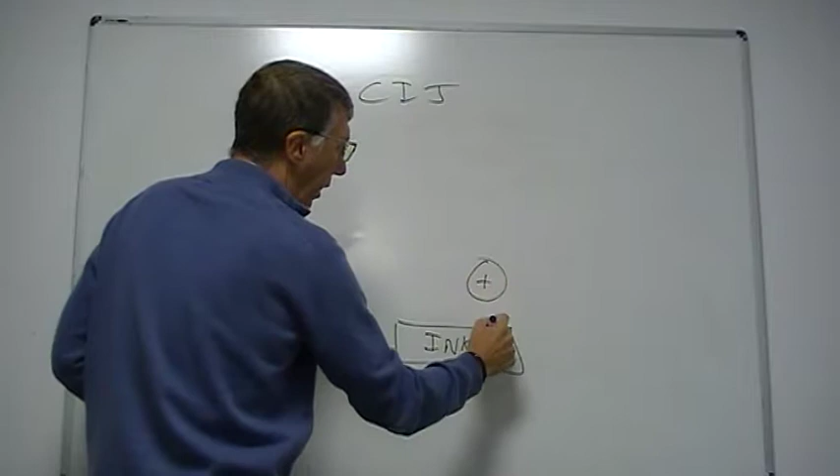The printers we're working with are CIJ, continuous inkjet printers. That means we have a reservoir of ink, a pump that takes the ink out and pumps it into a print head, where it comes out. Some of it goes onto the product we're printing, and some is recirculated back round the gutter into the ink reservoir, so the ink we don't print goes back around.

But what we're going to look at today is this portion of the system - how do we make the print drops in the head?

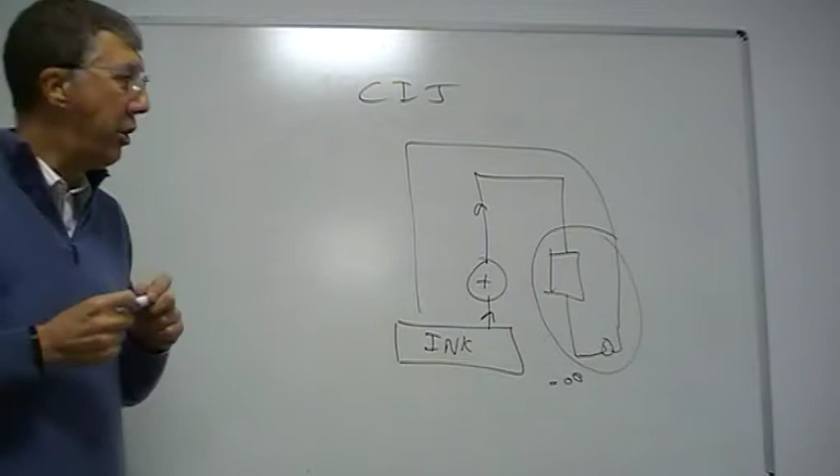There's a lot of strange terminology that we use here. In our print head, we have what we call the gun body. I'll draw them square and rectangular rather than their real shape. The gun body can have many different shapes and sizes, but it's called the gun body because it fires the ink out of it like a bullet.

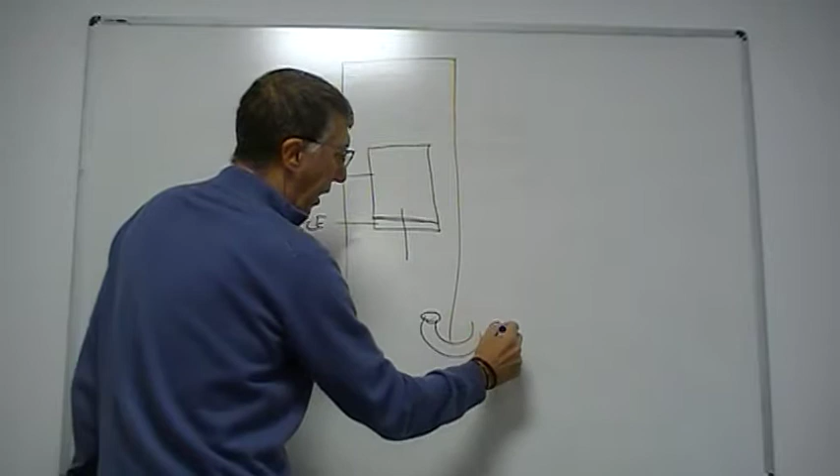Out of the gun body comes the ink. It comes through, and underneath here is a nozzle, and the ink comes out this nozzle. At the bottom there is a gutter, and there's also a hole in the plate where the drops can be sent out onto the product that's going to be printed, so there is print on the product.

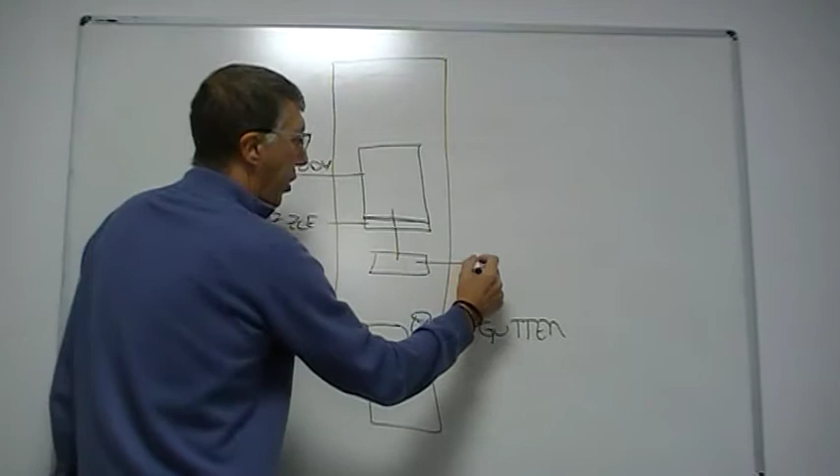Also in here we have what we call the charge controller, and we have two deflection plates.

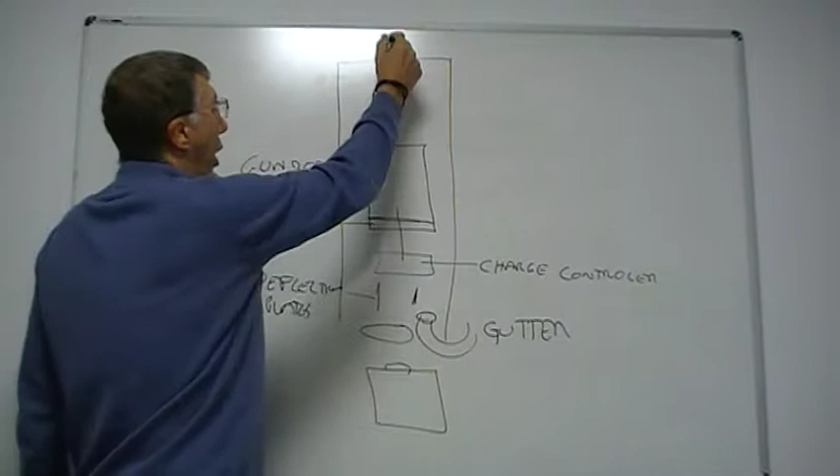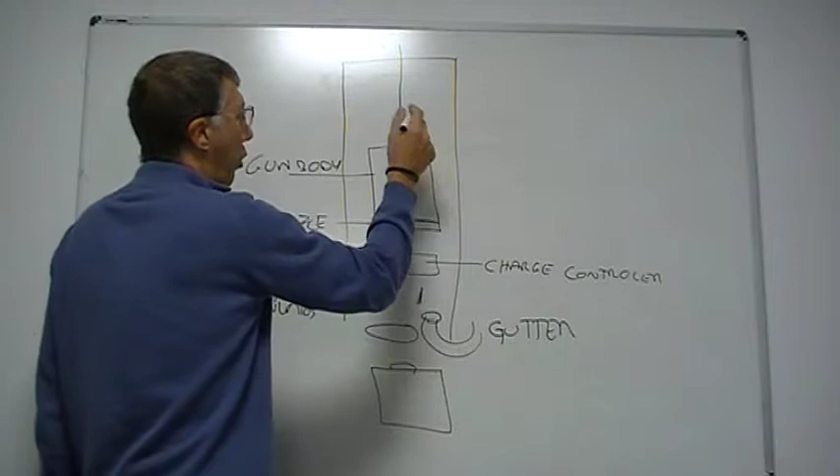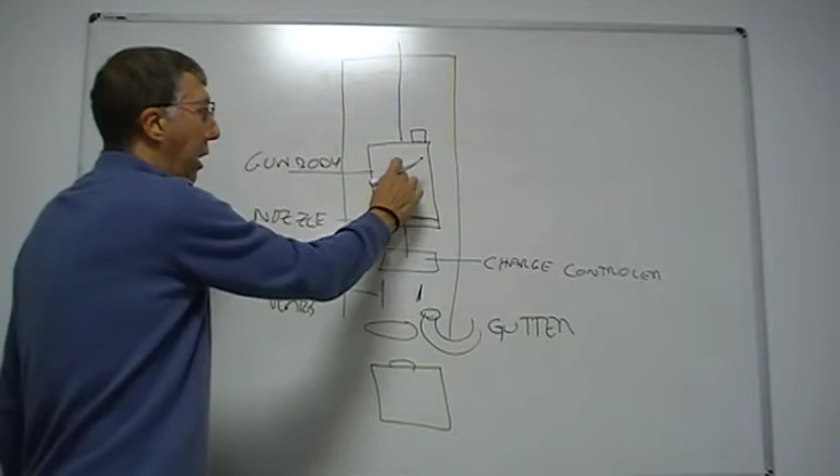So we have the ink coming in, we have a valve that lets the ink go out or stays in there, and we have another thing which we'll call the drive rod - they have various shapes. The drive rod is the item that's going to vibrate the ink inside here at a particular rate.

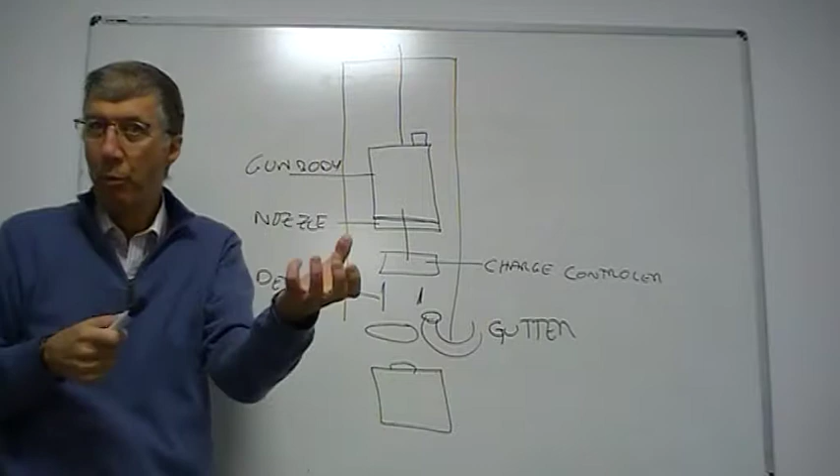This is very much like going out into the garden with a hose pipe in your hand, spraying water out of it, and you start shaking the hose pipe and it breaks up into blobs. That's what we're trying to do here, because we need to get the blobs out so we can put the different blobs onto the substrate.

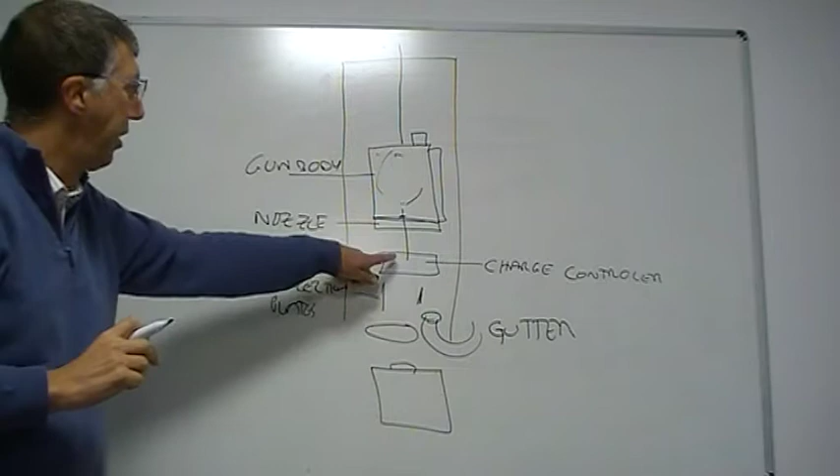So we've got the vibration going on here, the ink is in this reservoir. There's also a heater attached to the reservoir to keep it at the right temperature. Inside the gun body there's a valve over here - the valve opens, it forces the ink out of the head, going through the charge controller where it's charged down here.

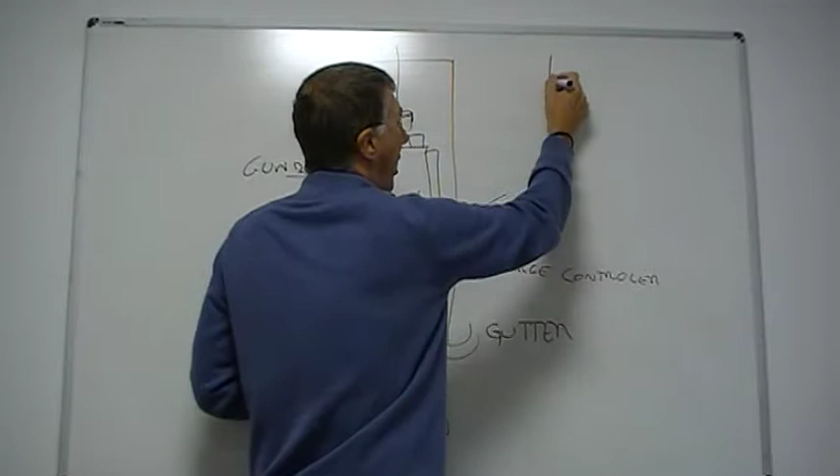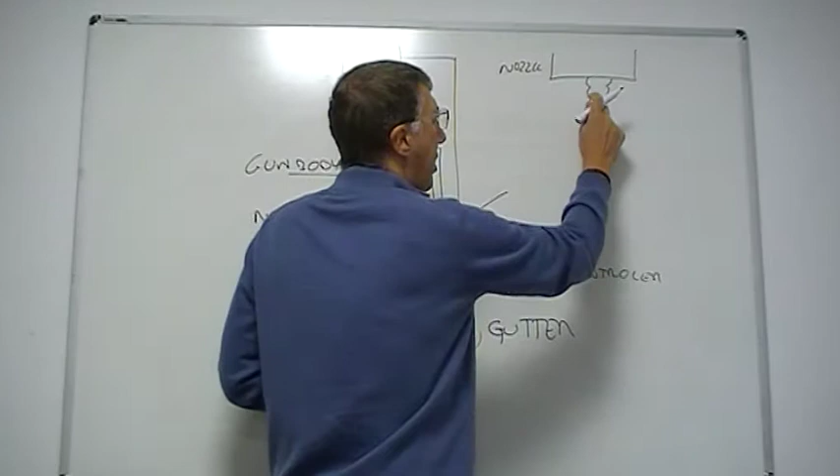Now we're going to look at this section of it, with a bigger view. So we come out of the nozzle and the ink is starting to break up into its blobs. Eventually the ink will start to break up, and normally it has a dimple in the top when it's broken off.

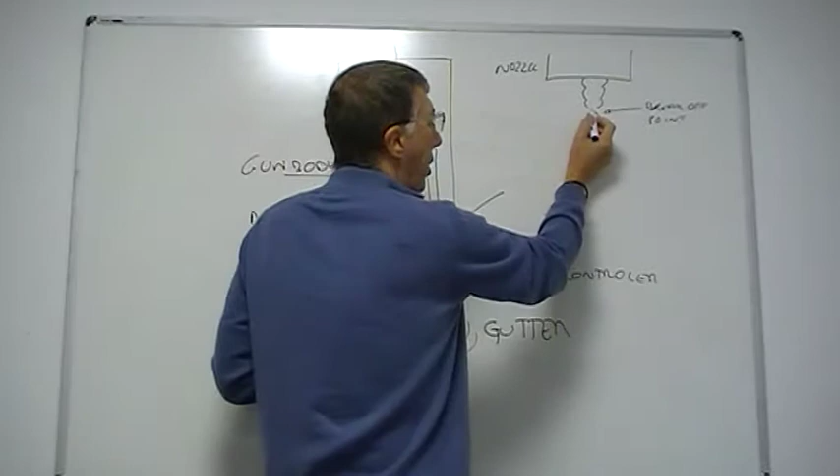That is the important item here - that's called the break-off point. Now why is that important? It's important because this is the moment that we put the charge onto the ink.

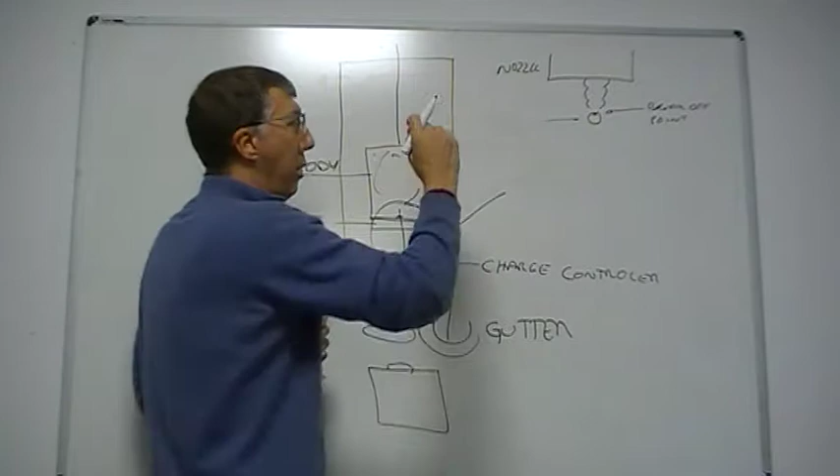At that moment, that ink drop should just be entering the charge controller - not above it, not below it, not in it, it should be just entering. So we have the charge controller, got a little tunnel where it goes into.

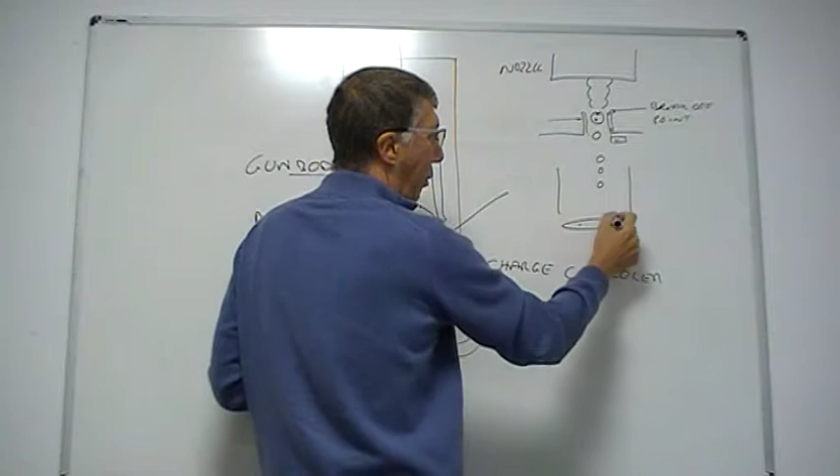In here it will apply a positive charge onto that ink drop. The drop carries on through, and over here we have a charge detection - the charge detector will check that the ink drop has a charge on it. The ink carries on through, and the deflection plates will now have an influence on where it's going to go, because they'll attract or repel the ink drop so it falls into the right place, either the gutter or onto the substrate.

Now, that's all good, that's the perfect way to have it. In the real world, things aren't like this - there's a lot of items that can have an influence on this break-off point.

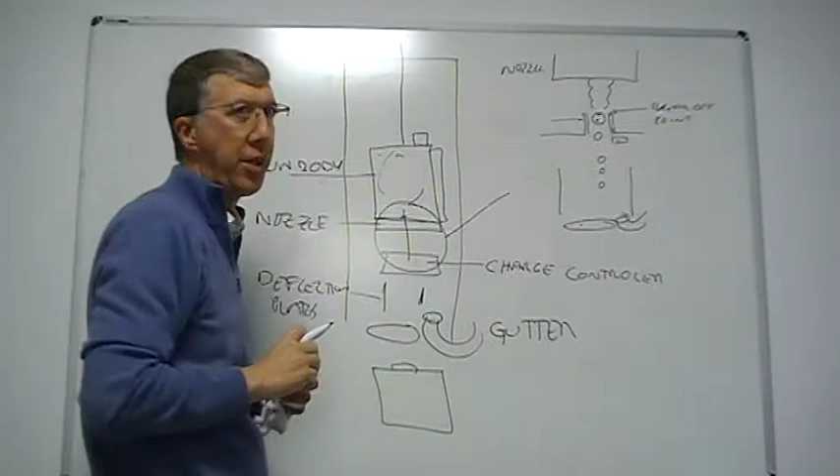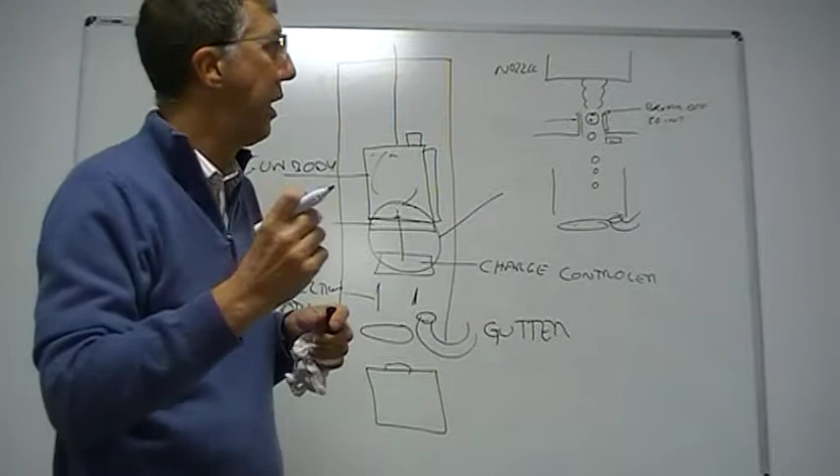Even though we might have set it correctly, things like the temperature of the ink, the frequency we're vibrating at, and the viscosity - how thin or how thick the ink is - could mean that this break-off point happens over here instead.

Now, instead of being able to get the full charge, it only gets a partial charge. Or worse still, we're applying a charge to this stream of ink that goes back up there. So if we want to apply 50 volts over here, it's not going to be 50 volts because it's all going to drain up into the top.

So we have this charge detector here, and every so often we send through a special sequence of voltages called the phasing volts.

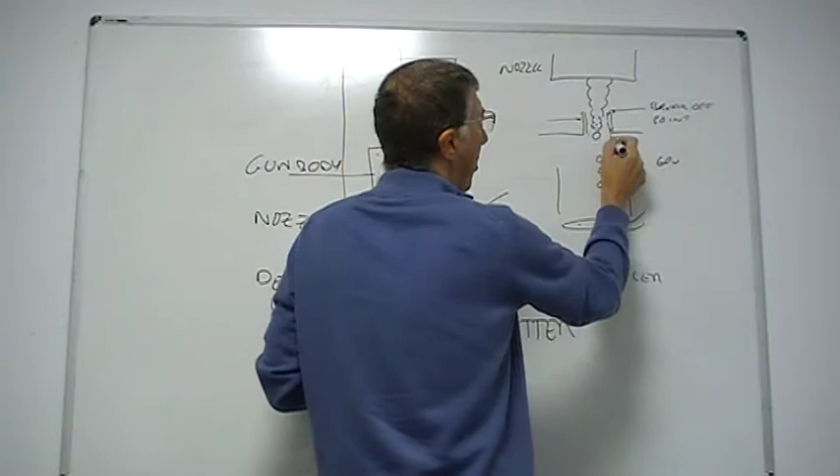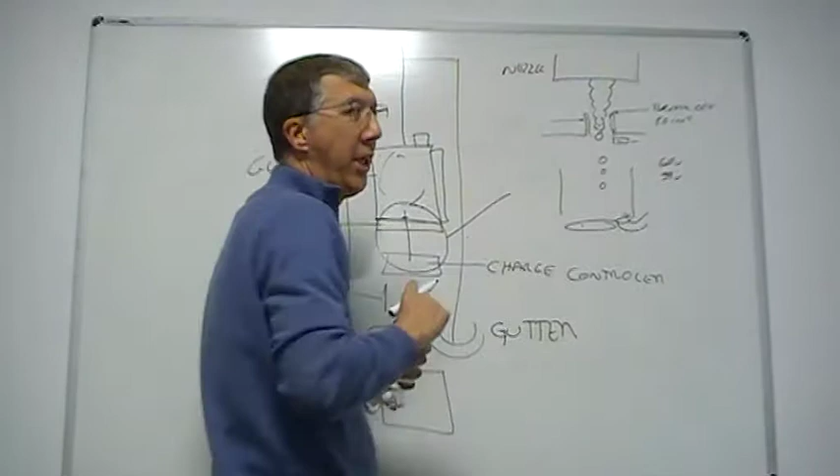So I know if I put onto that, say for instance 60 volts, by the time I read it I should have round about 59 volts in that sort of region. If I don't get that, then I need to do some tuning of the ink to make the break-off point happen in a different part, and this is called phasing.

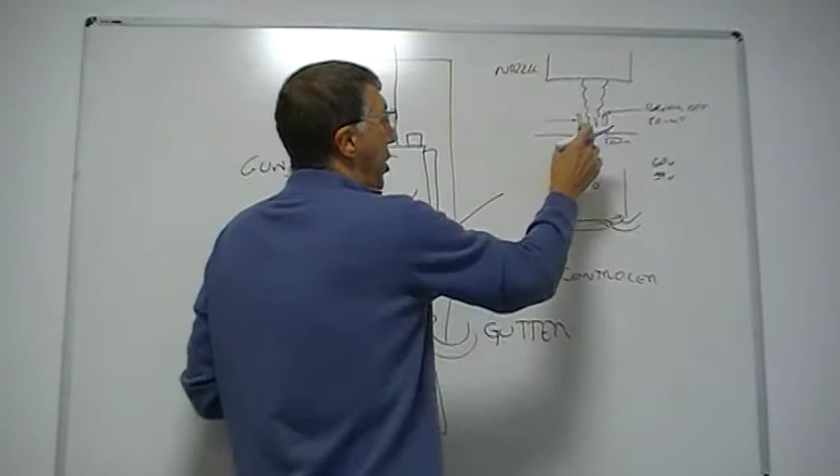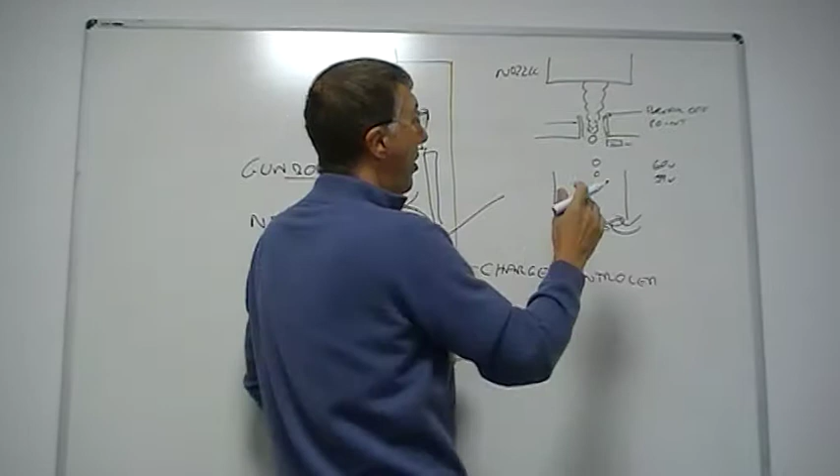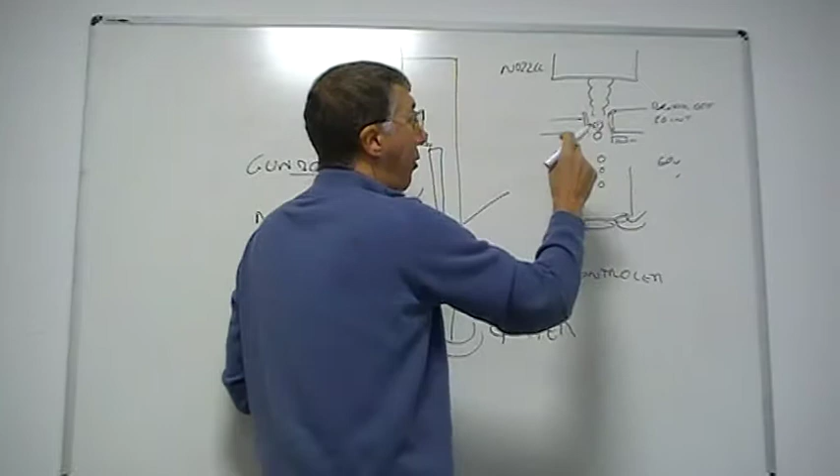You'll hear that term, phasing. So we might change what we're vibrating at, we might change the pump pressure, we might add some makeup later because we're getting thick ink, we might do various things, but we will test again. We'll do one change, we'll test. If we're getting closer to the value that we should have, we'll test one where we're pulling this ink stream up a bit and one where we pull it down a bit, and see which one was better.

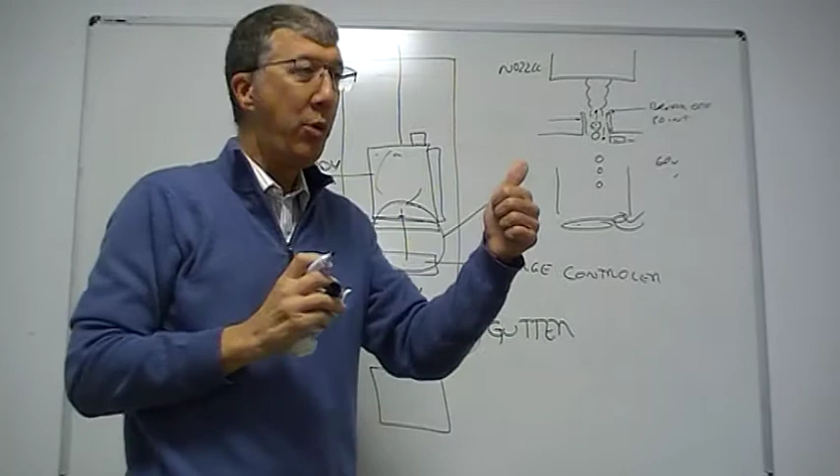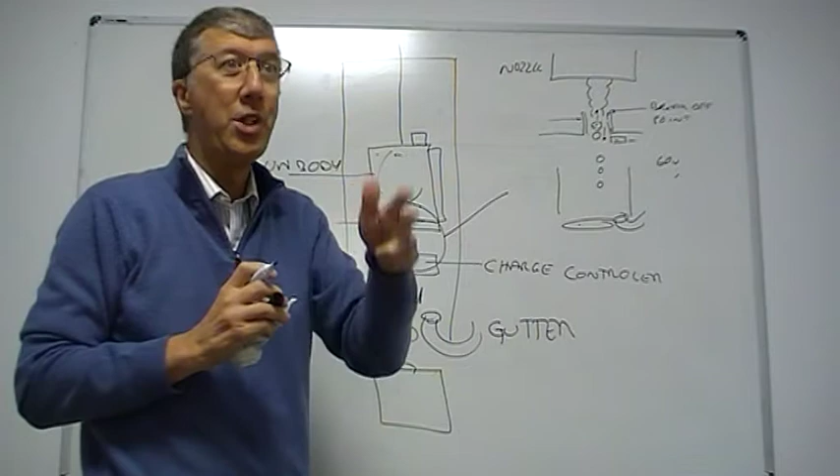So we had the first test that we did, we moved the ink stream one direction, then the other direction - which of those three gave us the best result? Then we moved to that result and we do the test again. As long as we've got time to do the test, we will carry it out. If we're printing, we stop the test and go to print. When we stop printing, we come back and run the test again. So we're constantly tuning so that every print can have the best quality.

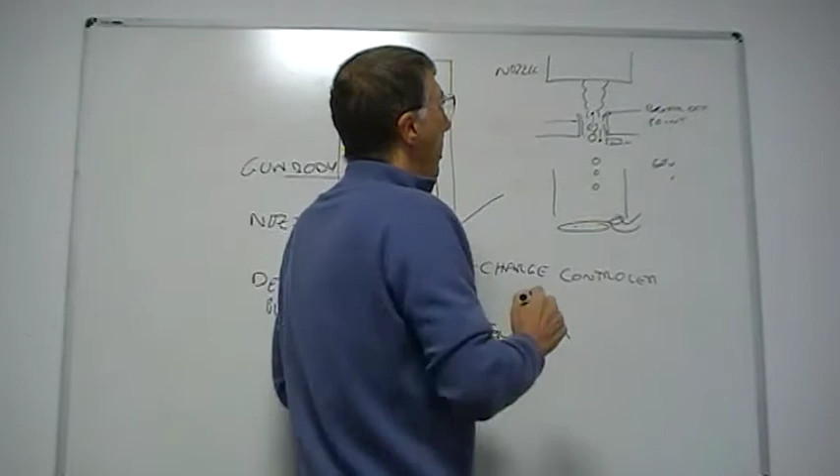So that's called the phasing. There's normally 16 phasing positions that it can have, and those are to do with changing the charge, the pressures, the vibration, and a lot of other things that go on in there.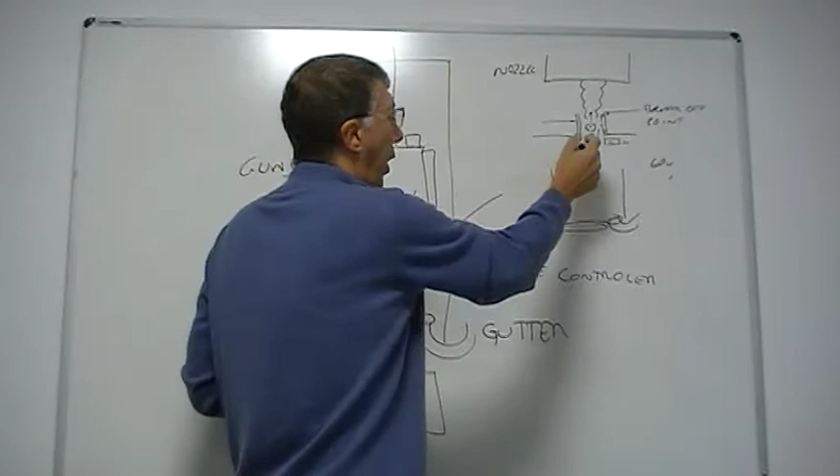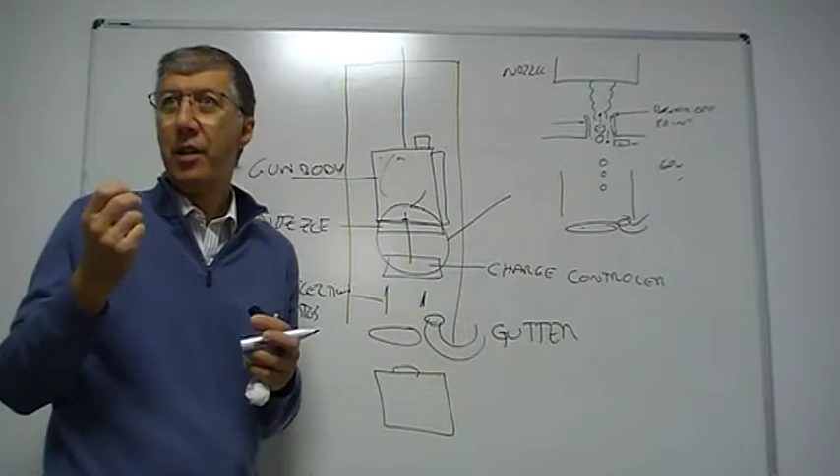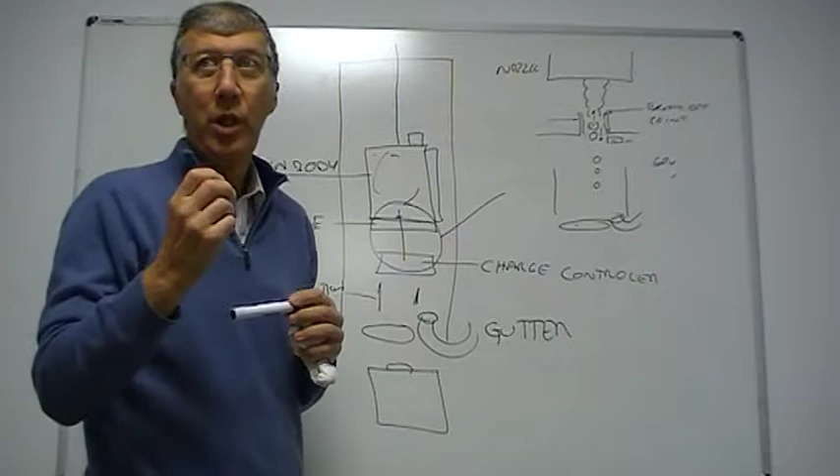One thing you might ask is, how do you get a charge onto a liquid? So the inks that we have are special inks. They add salts into the ink, electrolytes that will attract in the voltages that we apply. So it's also very important that the ink we use is not too old, because those electrolytes can fall out of the ink. If I was to apply a voltage to very old ink, it's not really going to do much.

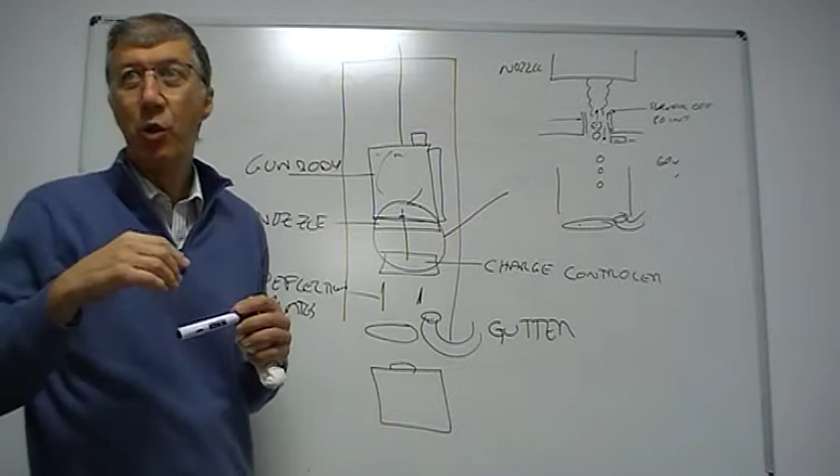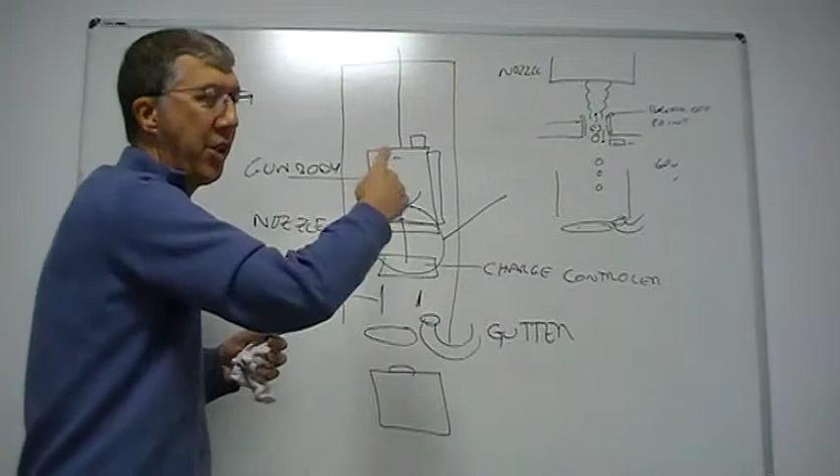This is why our inks have things called shelf lives. It can only sit there on the shelf doing nothing for a certain time, and when it's in the system, the ink has a lifetime in the system. It's 2,000 hours, 600 hours, depends on the type of ink it is and how quickly the electrolytes would come out of it.

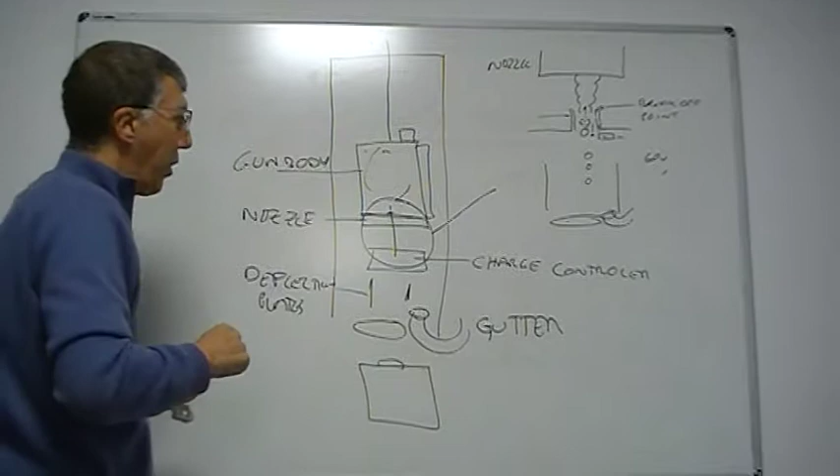So this is how we're going to make our ink drops. Any questions?

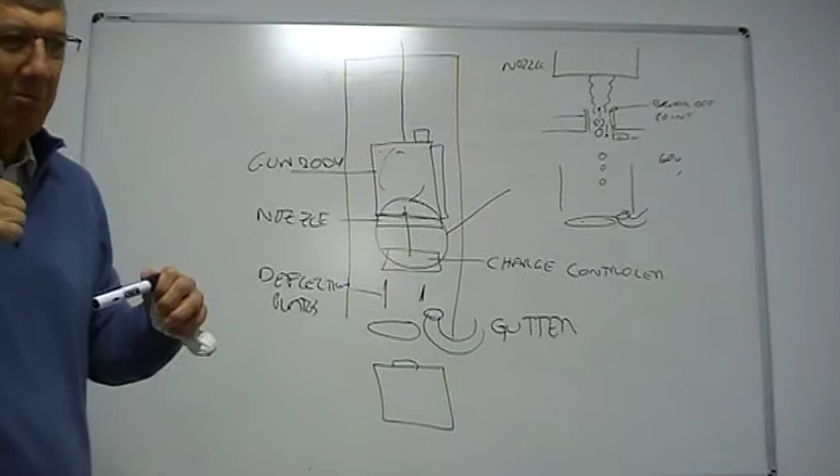Was it? Can't remember. I probably heard, but what determines how far the drops are deflected? Do you control the deflection voltage or the charge voltage on the fly?

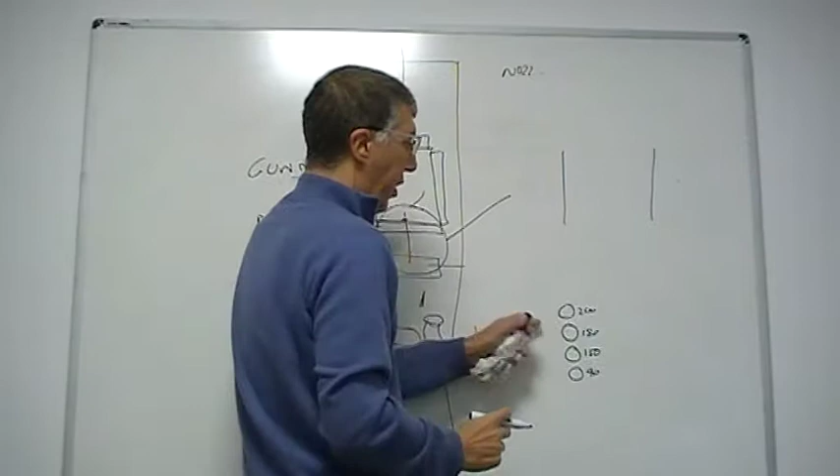Last week we did rasters, where we found out that rasters are made of drops. Each drop can have a voltage on it, so we can charge our drops. The drops come out here and they're charged - say 90, 180, 200.

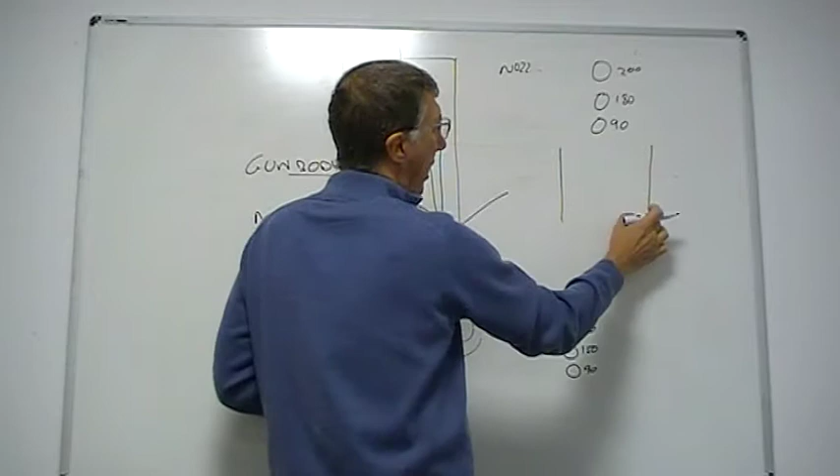In this here there are two plates, and the two plates have an electric field between them, so one will be positive with respect to the other. That remains constant? Yes, that's constant.

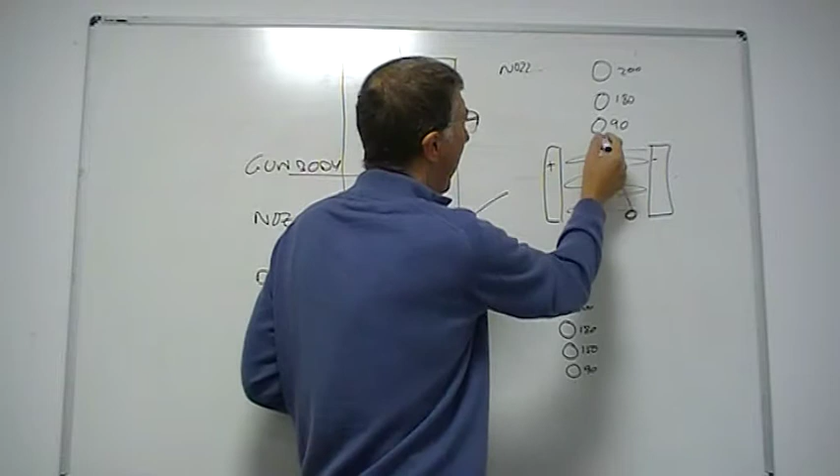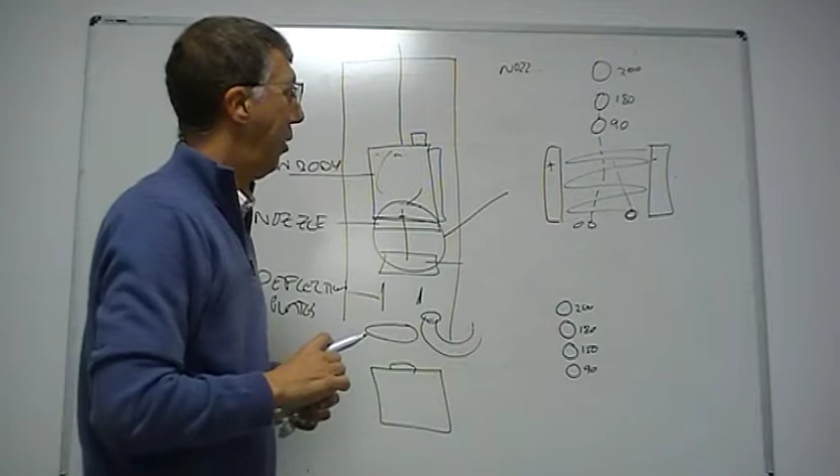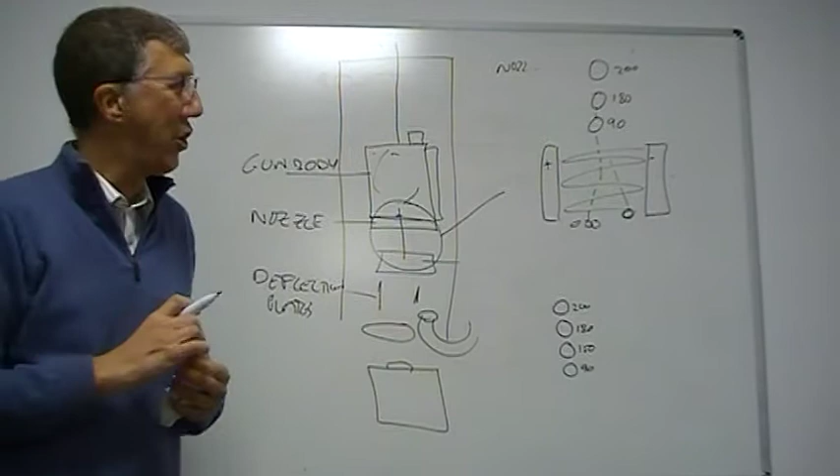If you would be controlling the deflection voltage on each drop, you would get very slow print speed. Yes, yes - an innovation project for you, to see if you could do that. There are many ways, but this is kind of the standard way of doing it.

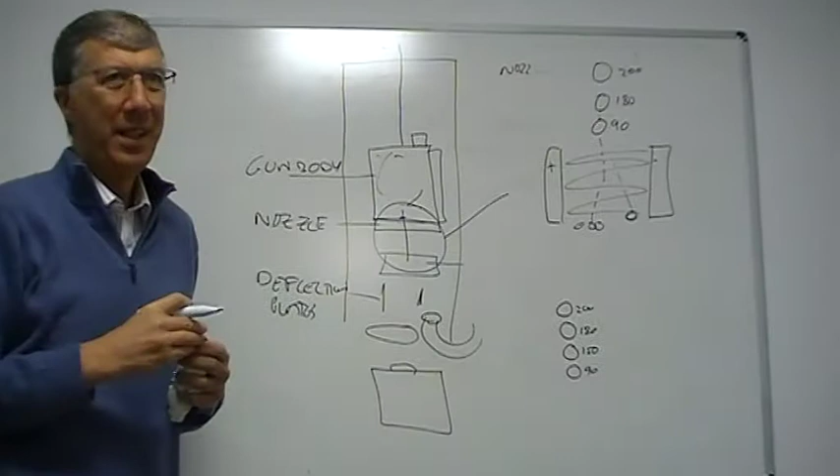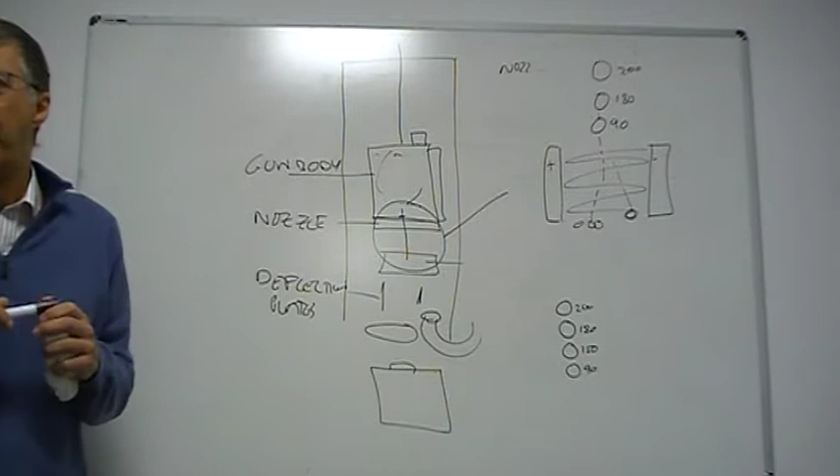So what impact would we notice if the system doesn't have enough time to phase? So there you would get this bad print.

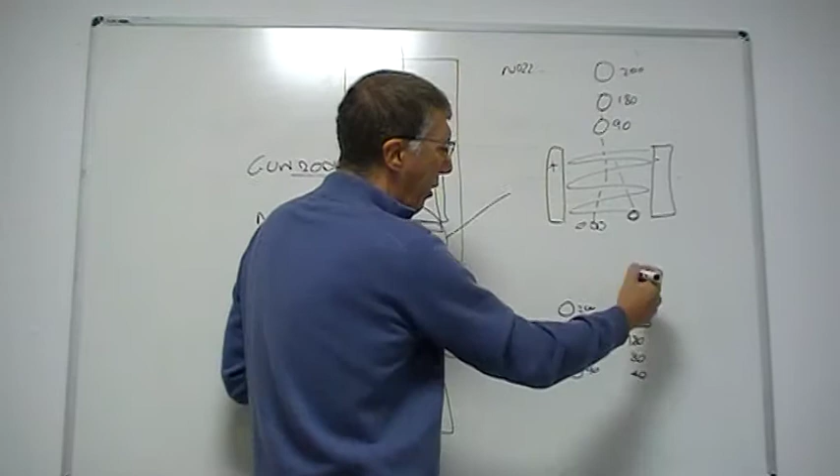So you would see, instead of having your print nice like this, because we weren't able to get the full separation, we applied the voltage, but because it was all co-joined and went back up, we might in reality have something like 40 volts, 80 volts, and then maybe 120 volts got in somehow, and maybe 220 volts. So all the voltages go all over the place because of the stream.

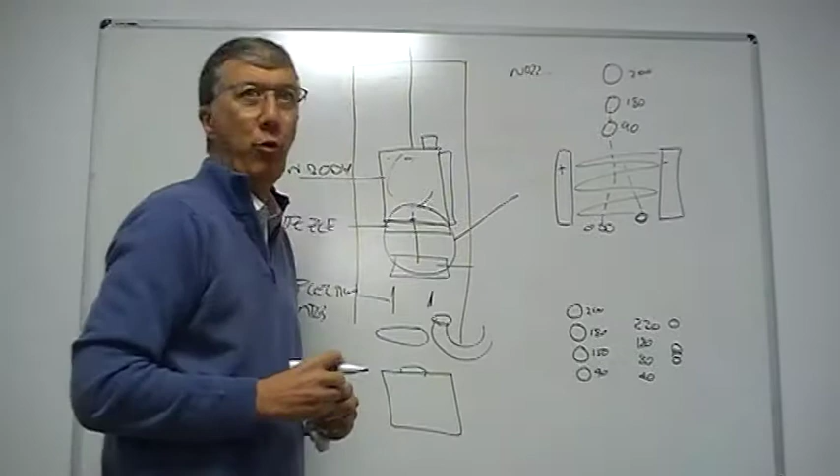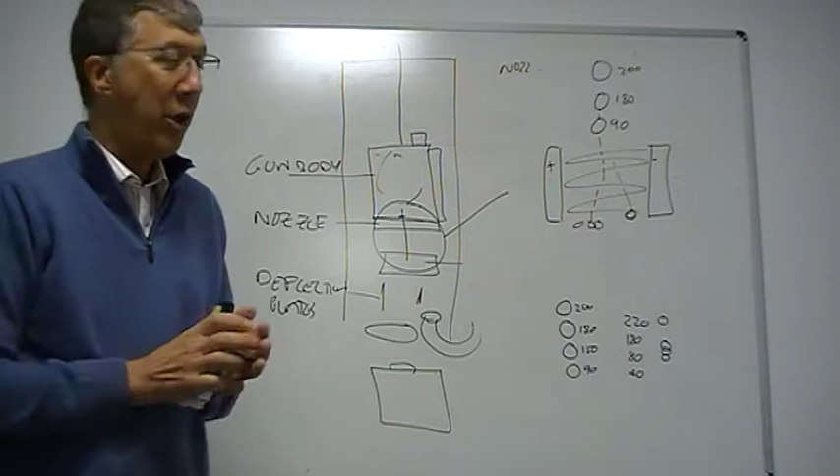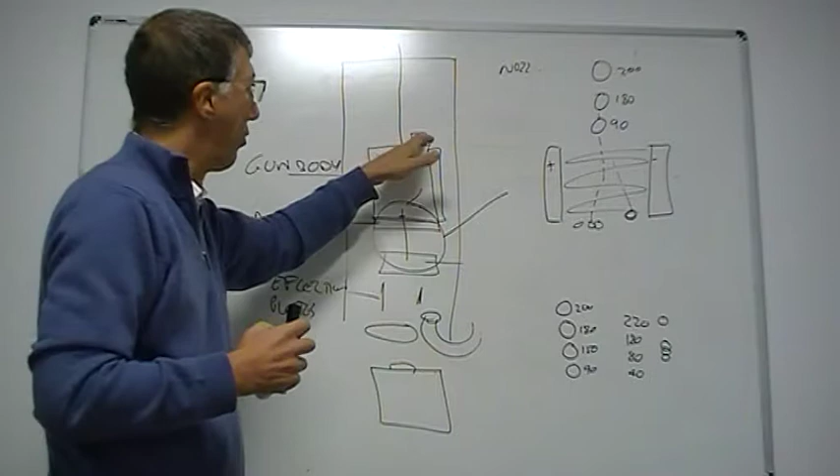So instead of having it print like that, we might get it print something like this because of the voltage - they're all attracting and repelling each other. That's bad phasing, so you'll see that as bad print. Bad phasing can of course be caused by the break off there, which can in fact be old ink, not the right pressure on the ink, or not vibrating it correctly. There's a whole host of problems that can cause that.

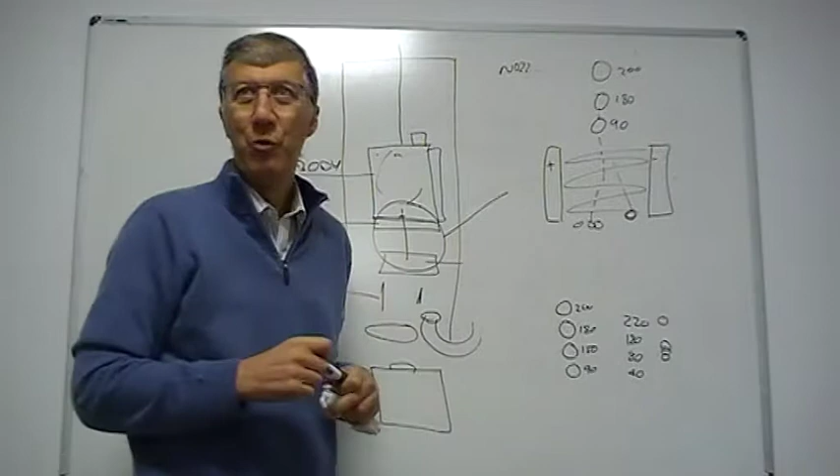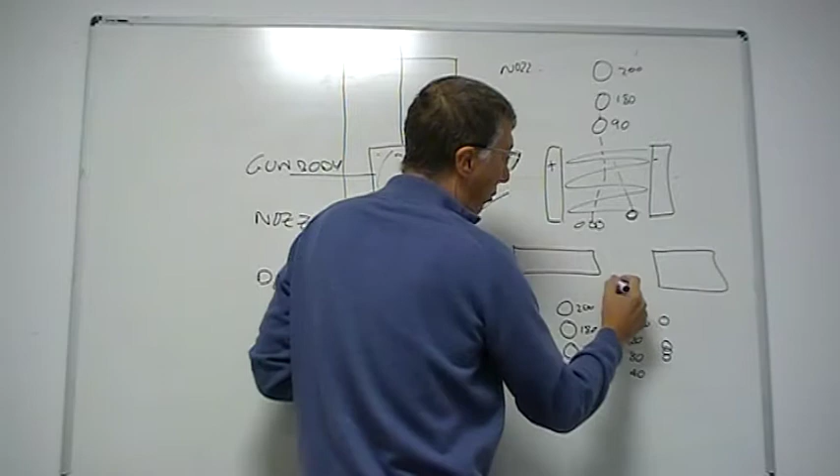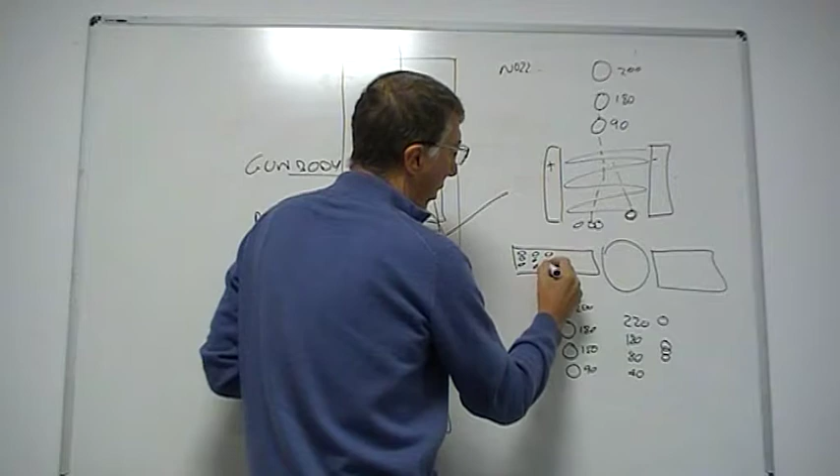When the printer's printing well, you can print very fast and it all looks good. Some printers phase in the space between labels, that's our label and that's our label. Other printers phase between the strokes if possible, so you're on a constant phasing.

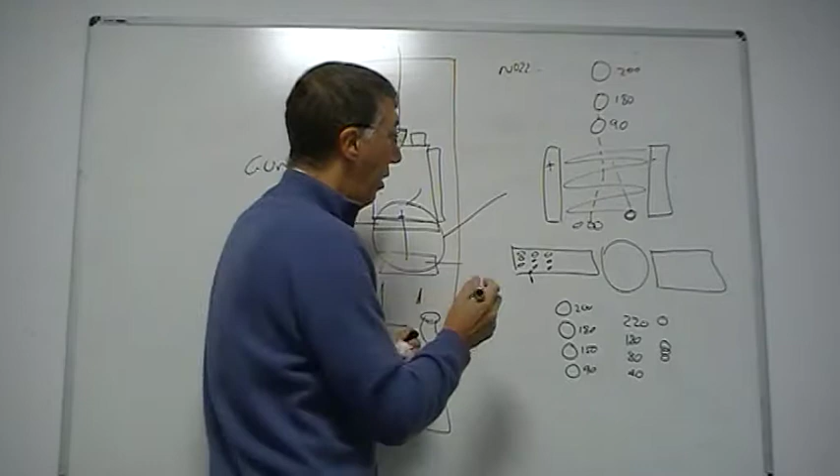Remember I said we normally do about 3 tests, one where I'll move it up, move it down. If you try to do it here, you might do 1 test there and 2 tests there, keeping this rolling set of results. If they're too close together, you might do 1 and abandon it, or do all 3 tests in that area.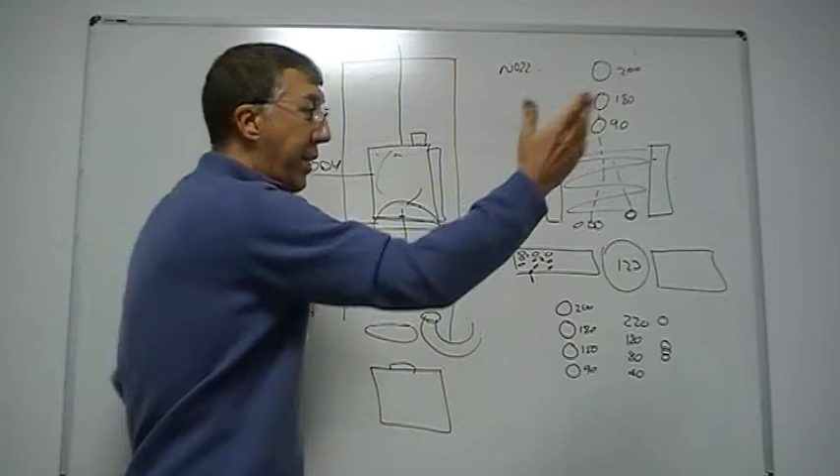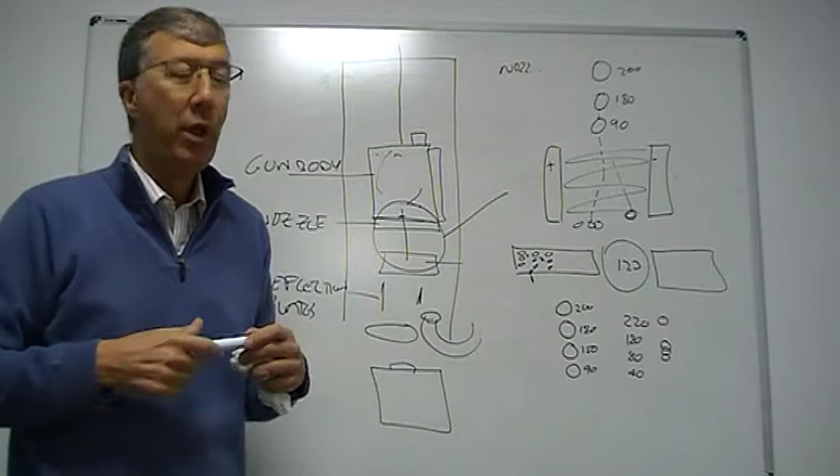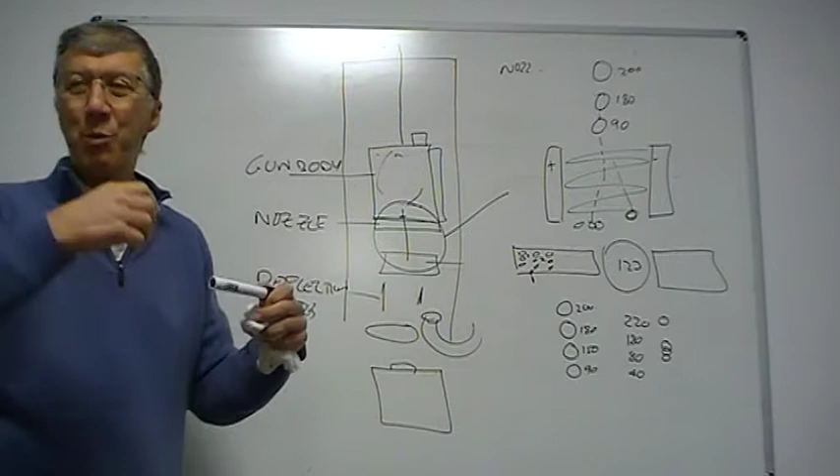Sometimes if you print a very long message, the printer might tell you to check the print quality because it thinks it hasn't been able to phase in a particular time. To be honest, when the printer is up and the temperature of the ink is running well and it's been running for a while, phasing doesn't really alter. But when you start up in the morning with cold ink, and then it heats up and becomes less viscous, you get problems during the day. That's why it has to do a lot of work early on. Also, if your ink gets old, that's another thing.

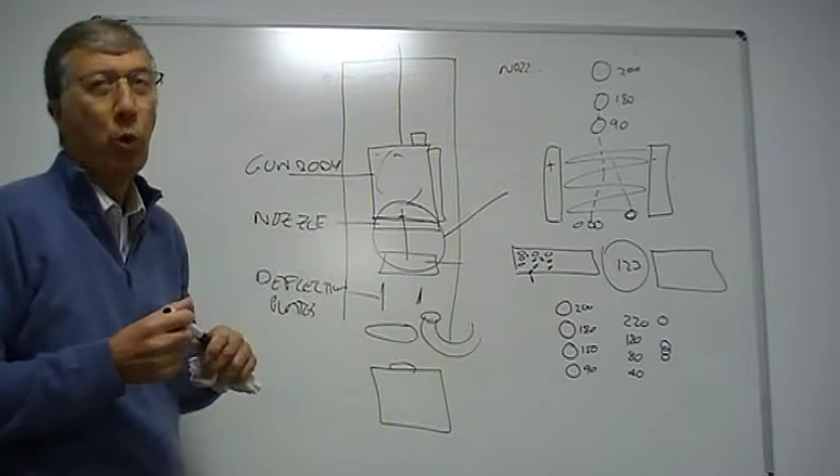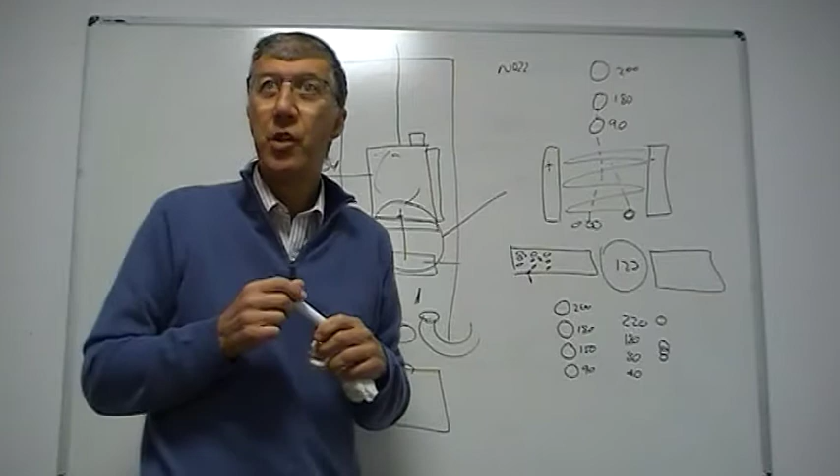Can you tell if the printer is doing that adjustment? On some printers you can, yes, because there's a screen where you can see the phasing where you are. You won't see it actually do the phasing, but you'll see where it's moved to.

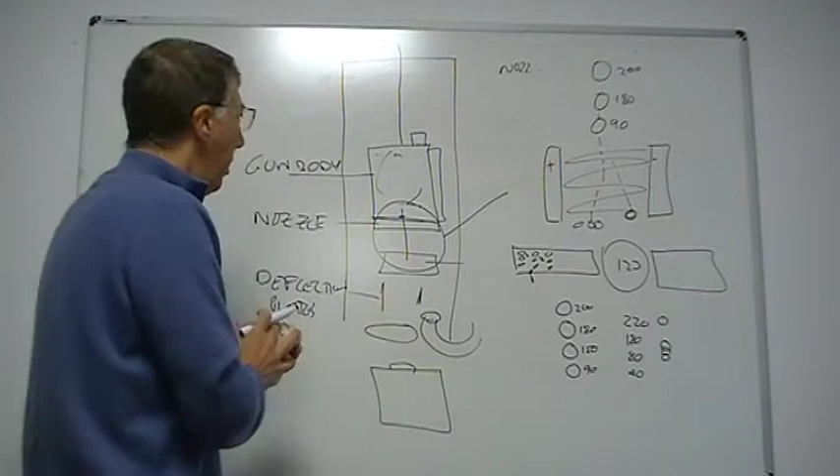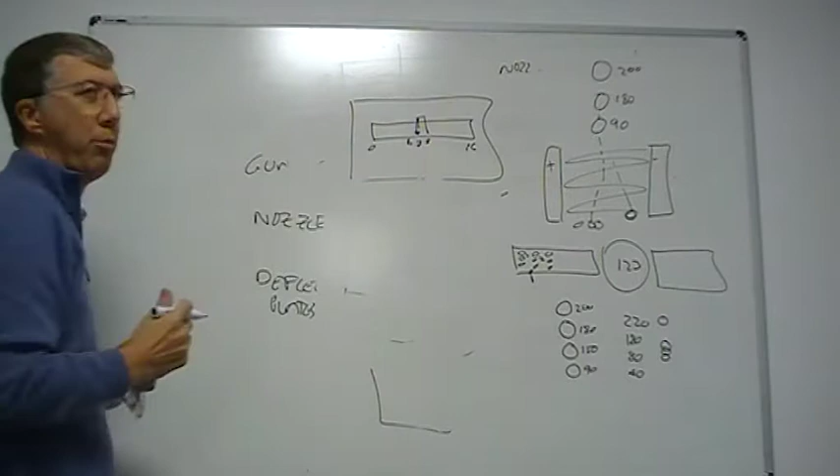So you have a screen, and on the screen there's like a slider type thing from 0 to 16. You see it's normally sitting at say 7, and we go to test on one side at 6, we'll test at 8, and then you'll see it move to 8 if that's better for those circumstances. You're hardly ever at the extremes, you're mostly in the middle. If you do see it at the extremes, there's a problem, because it can't really move unless it wraps around, since there's nowhere else for it to go.

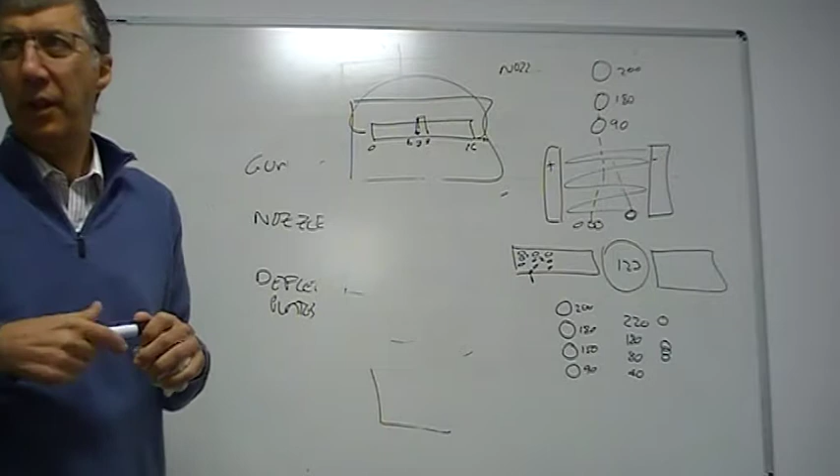So you check your pressures, your temperatures, and so on, and you can find that information in the printer status screen. There is information about phasing there.

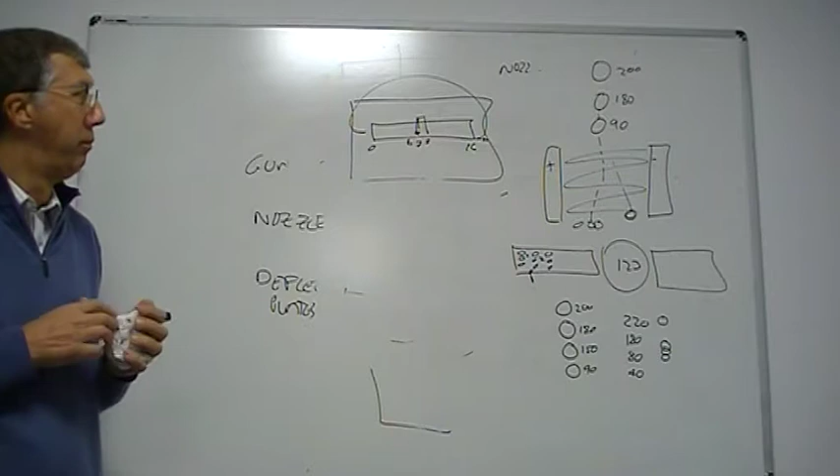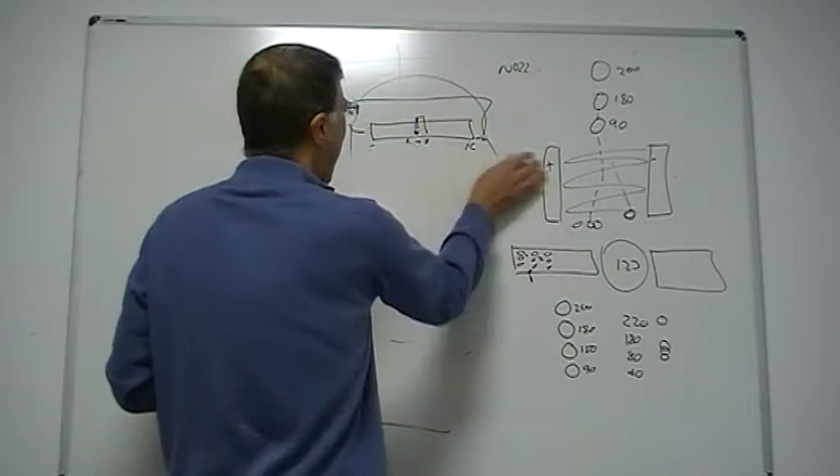So when you're phasing, do you only put a small voltage on there because you're still going into the gutter? That's a really good question to ask - yes. So we've got the head, and we've got drops that go onto the substrate, which will have a minimum and a maximum voltage on them.

We have our gutter, and drops that aren't used are sent into the gutter. So the voltage you put onto the phasing also has to come into the gutter, but on the new printers we put this just on the inside, so you'd have your voltage just slightly more to go into the gutter. On some printers, where the ink stream is on the other side, they'd have the voltage come this way, so it's just slight. If that was, say, 60 volts to get into the gutter, these voltages would be around 58, 59, 57 maybe - just picking some numbers there. So they would all end up in there.

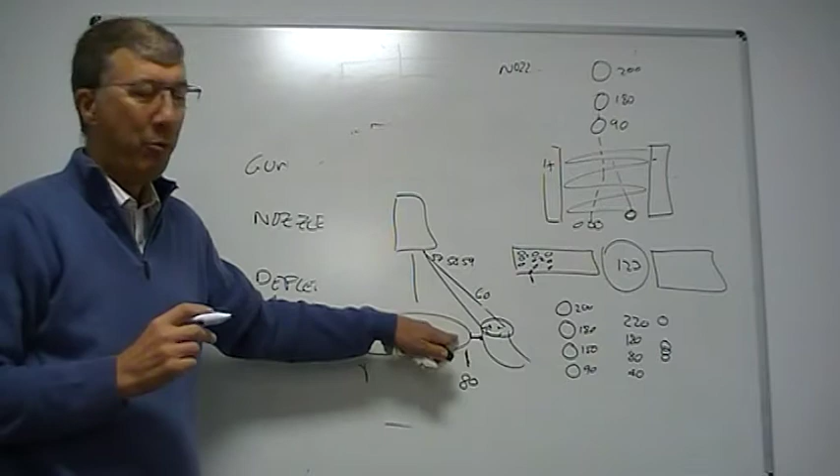So the first printed drop might have a voltage of 80, so we've got quite a way to go. There's also distance between those two before we're actually going to get the drops here. It's not a good idea to let drops build up on the edge of the gutter, because that buildup can start to affect that area.

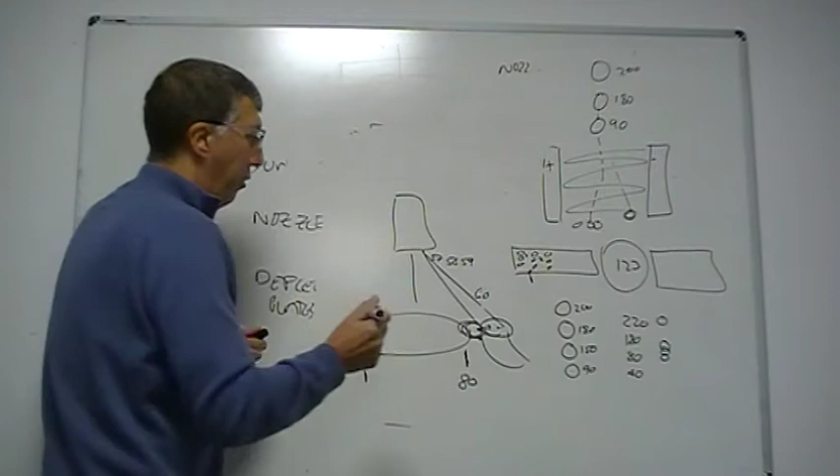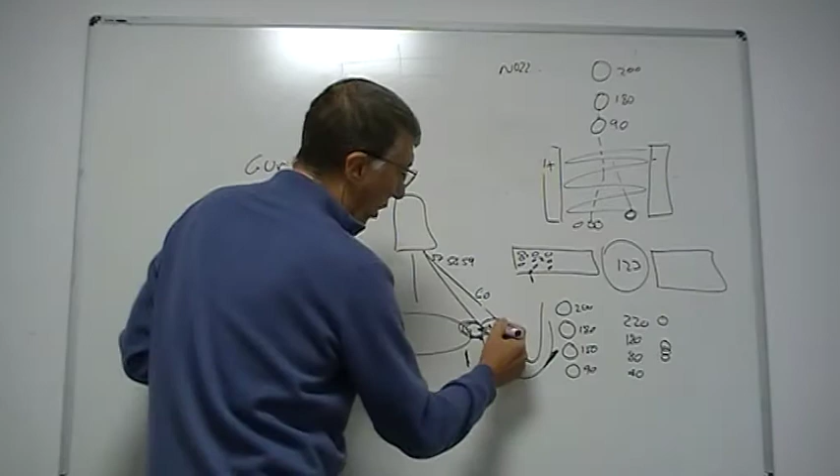And how do we remove the charges from the unprinted drop? When it reaches the gutter, there's normally an earth on the gutter to drain it away. Because after this bit, which is metal, you normally have a plastic pipe - it has to be flexible in the head, so they're all plastic pipes.

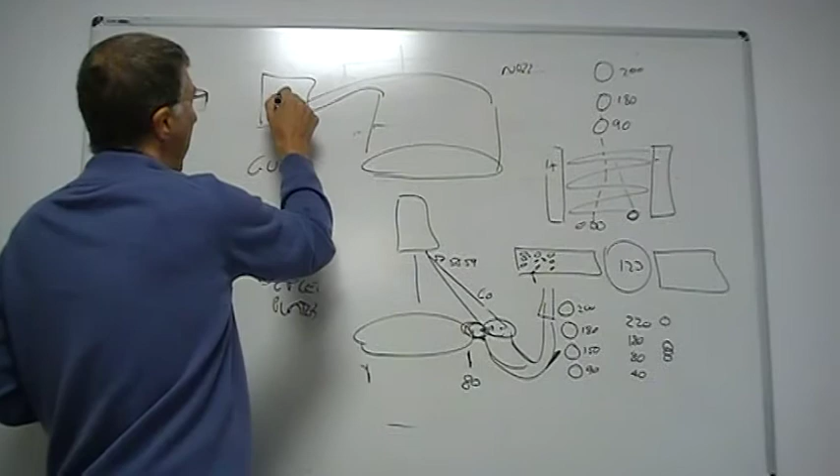So we have to drain it away in the head before it gets there. The head is attached to the big conduit, and the conduit has an earthing in it to drain it away. That earthing must also be attached to the printer chassis, so this and this are all at the same potential, and it can drain away.

Because otherwise, from the gutter you go back into your ink reservoir. You don't want that to be at a higher voltage than anything else, because this is flammable ink - if there's a spark, we could have a fire.